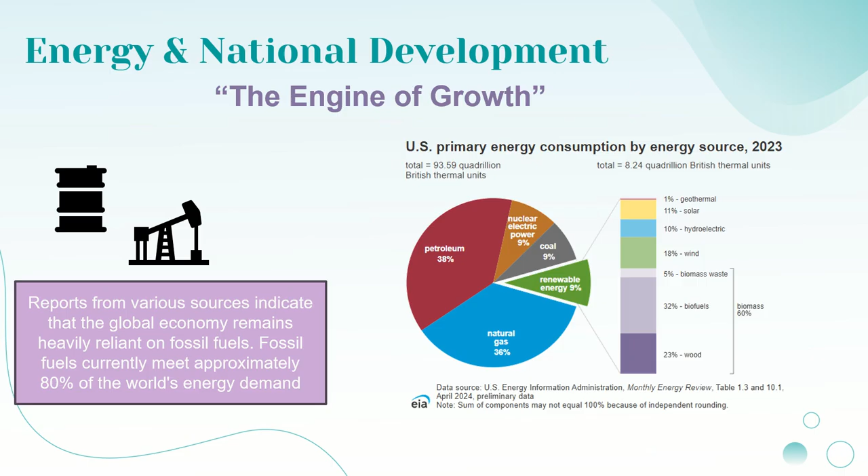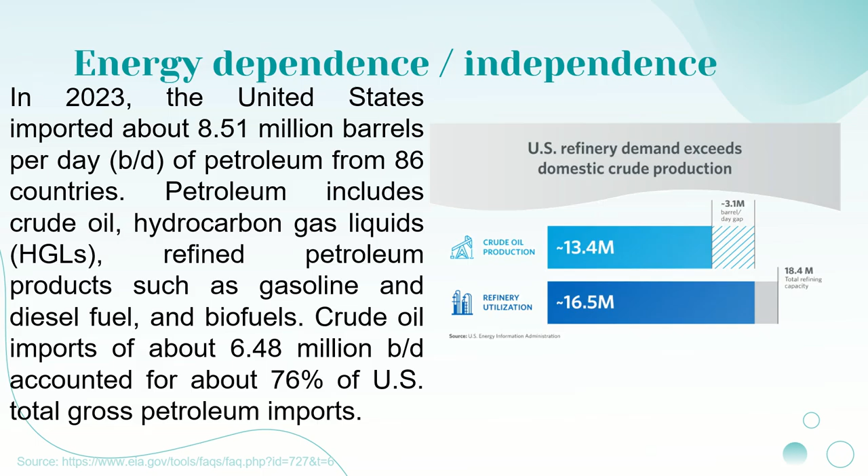But until today, reports from various sources indicate that the global economy remains heavily reliant on fossil fuels. Fossil fuels currently meet approximately 80% of the world's energy demand. Regarding energy dependence and independence, in 2023 the United States imported about 8.51 million barrels per day of petroleum from 86 countries. Crude oil imports of about 6.48 million barrels per day accounted for 76% of the United States' total gross petroleum imports. And why am I saying that?

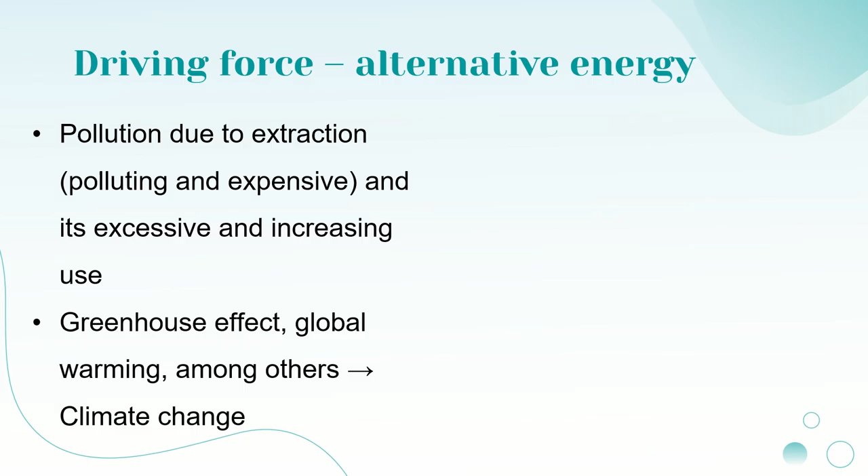Because it's important to remember that one of the most important things for a country is to be energy independent, and I will tell you why in the next slide. Another driving force is the pollution due to extraction and the excessive and increasing use of fossil fuels. Another is the greenhouse effect, global warming, among others, like climate change, right?

Remember that I said I'm going to talk about this later. So why is it important to be highly independent in energy? In the past, we had...

So investing in bioenergy is not only about sustainability, it's not only to prevent the impact on the environment, it's a smart move. Sustainability meets innovation. So the driving forces here would be climate change mitigation, like carbon neutrality, reducing greenhouse gas emissions, meeting climate targets.

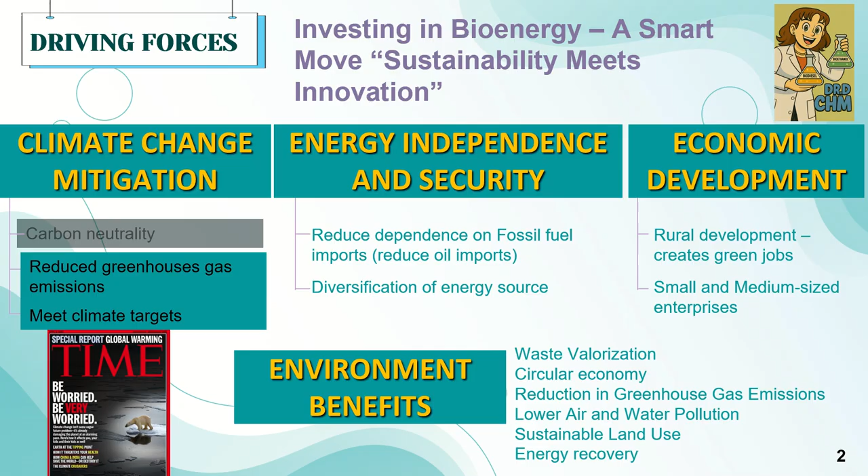And of course, we have some solutions like renewable energy: solar panels, wind turbines, geothermal power plants, hydropower. These are crucial, but not enough alone to meet global energy demand or emission goals.

It's important as well to remember that every process can generate an impact. That means that if you're trying to minimize the impact on the environment from the use of fossil fuels, but you're using fossil fuels to produce bioenergy, that doesn't make any sense. Sometimes you're doing everything right, however you are creating another impact.

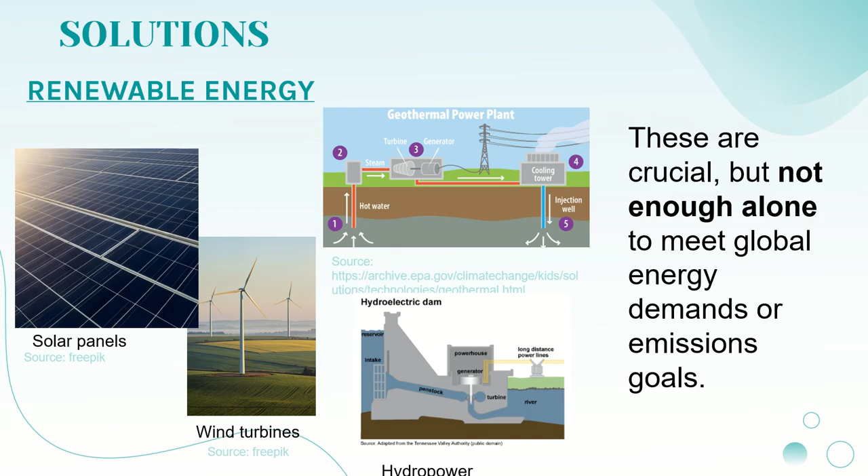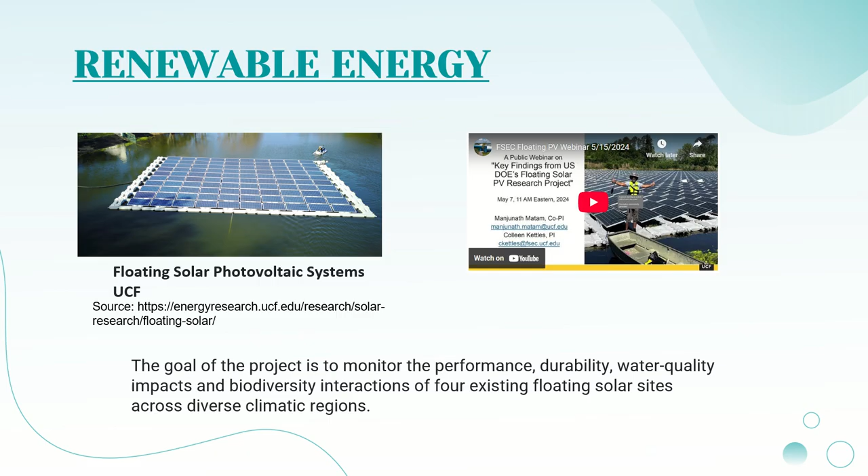This is why we always need to study everything, background studies and everything that we do. For example, with floating solar photovoltaic systems, UCF has a study, a research project to monitor the performance, durability, water quality impact, and biodiversity interactions of four existing floating solar sites across diverse climate regions. This is important because sometimes we think that's a good step, a good way to produce renewable energy, but then we are creating another impact. This is why those results are really valuable.

Besides renewable energy, we have bioenergy, which is also renewable, but not all renewable energy is bioenergy. Renewable energy encompasses a broader range of sources like solar, wind, and geothermal, which don't rely on organic matter like bioenergy does.

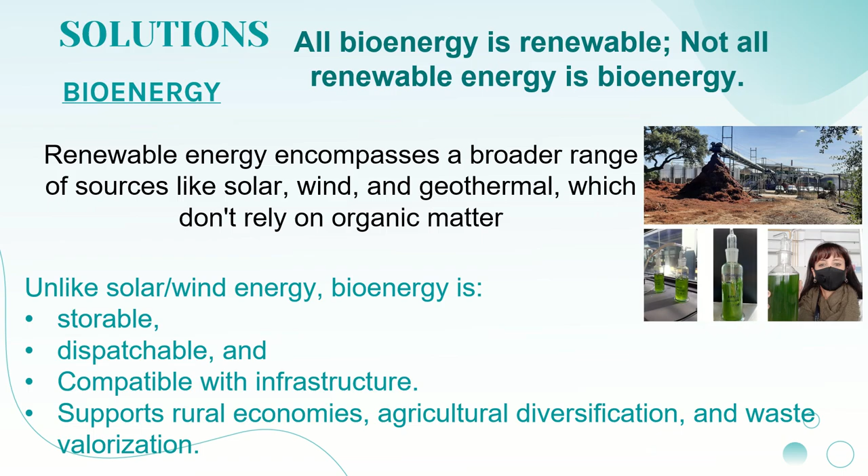That is a case of waste valorization, where we can use those microalgae not only to produce bioenergy, but also to produce protein as well.

Bioenergy is a form of renewable energy derived from biomass. And what is biomass? Biomass is defined as organic material derived from plants and animals, agriculture waste, algae, and more, used to generate fuel and electricity. It can also be defined as any organic material or waste that contains chemical building blocks like hydrogen and carbon.

These components are vital to our modern energy and materials economy. Biomass is the single largest supply of carbon on planet Earth, and is a sustainable and renewable source for products that are currently made from petroleum.

Here's how it works: we have photosynthesis. Trees and plants absorb the sun through photosynthesis, a complex process that involves the plant using energy from sunlight to combine carbon dioxide with water to produce sugar.

The energy is trapped inside until the organic material is converted into other products used as a source of energy and materials. Biomass contains carbon absorbed by plants through photosynthesis.

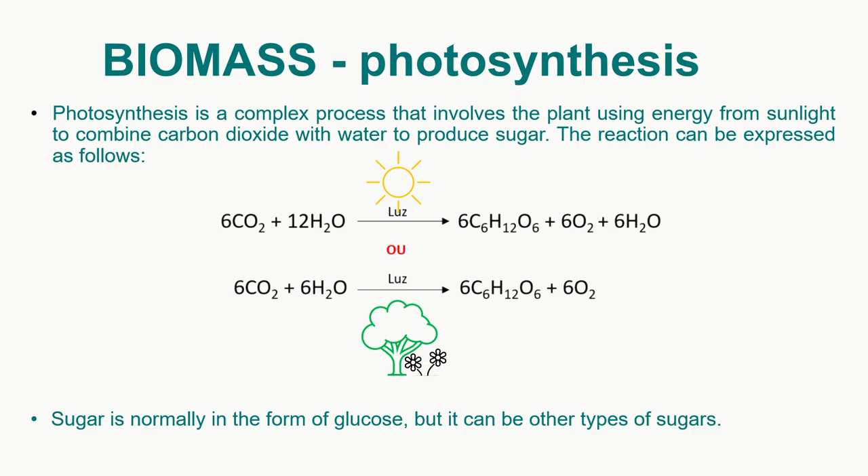When biomass is used to produce energy, the carbon is released during combustion and returns to the atmosphere, making modern bioenergy a low emission fuel.

We call this biogenic carbon dioxide, which originates from recently living or once-living organic matter, unlike fossil fuels. This CO2 and the carbon cycle here are part of a natural, relatively short-term carbon cycle.

Plants absorb this biogenic CO2 and use it during photosynthesis to produce sugar. These plants absorb it, then we use it again, then we burn it and it goes back to the atmosphere - that is a sustainable cycle.

With fossil fuels, this doesn't happen - non-biogenic CO2 is emitted to the atmosphere, but we don't have plants to absorb that carbon. So fossil fuels produce CO2 that isn't absorbed. That's why we have carbon-neutral bioenergy sources.

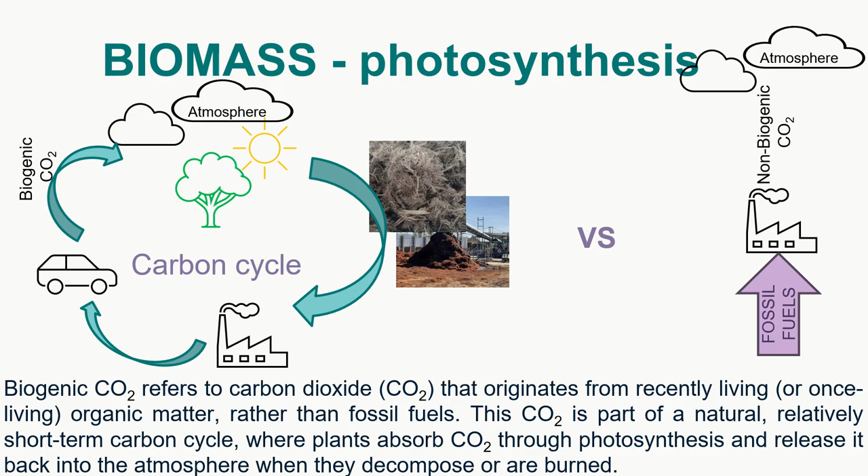There are several kinds of biomass, such as agricultural residuals and purpose-grown energy crops. Biomass also includes waste, and there are processes that work for many types of waste biomass, like animal waste.

Believe it or not, manure from farm animals, mostly cows, can be used to make electricity. It's put in a big tank called a digester, which we'll talk about in a few slides.

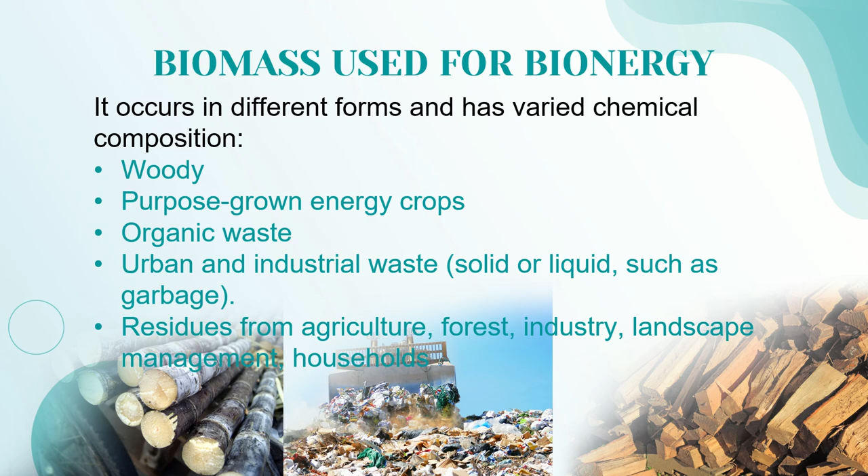Methane can also be captured in landfills, and we're going to talk about this as well.

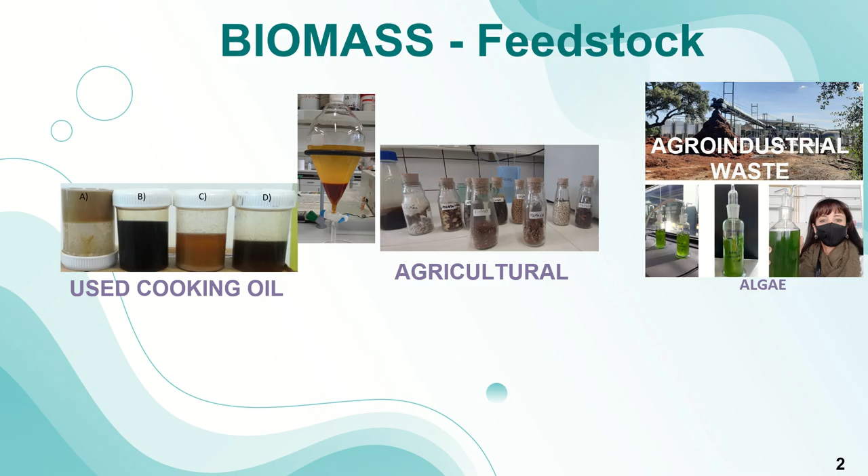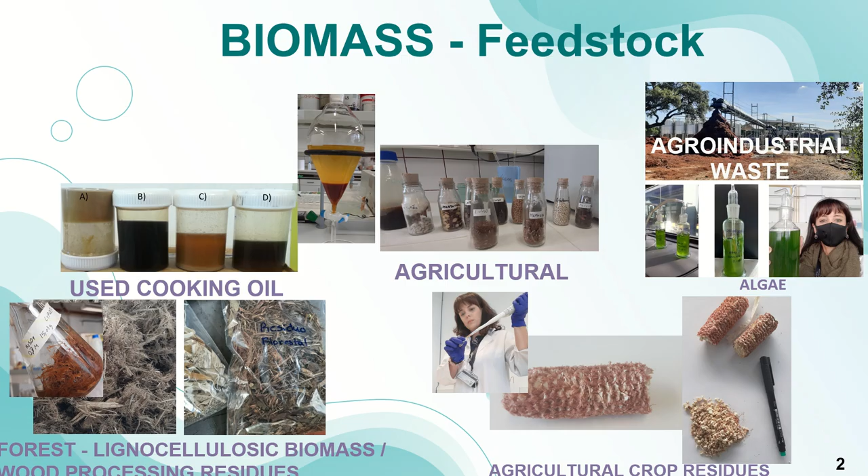Here we have a sample of other types of biomass, like used cooking oils, which can produce biodiesel from that waste. We also have agro-industrial waste, crop residuals, and forest lignocellulosic biomass like wood processing residuals - this was part of my last project.

Time to think a little bit. I will ask you to stop the video and think about this question: is any biomass useful for producing bioenergy?

Can I use any of the types I gave you as examples? If I'm looking through my window right now, I can see a tree outside with birds eating the seeds - something we humans don't eat, but the animals do. So probably there are some sugars there - do you think I can produce ethanol from that?

So is any biomass suitable for producing bioenergy? Think a little bit - those leaves that are coming down, do you think you can grab that and produce energy with it?

Okay, so the success of the biofuel and bioenergy industry depends on the quality and the quantity of biomass available, in addition to the cost effectiveness in terms of production and usage. So we depend on physical characteristics like humidity, granulometry, and density, chemical characteristics like energy properties, and rheological properties like elastic and cohesive. So the sustainability would depend on the type of energy, technology available, economic sustainability, and environmental sustainability.

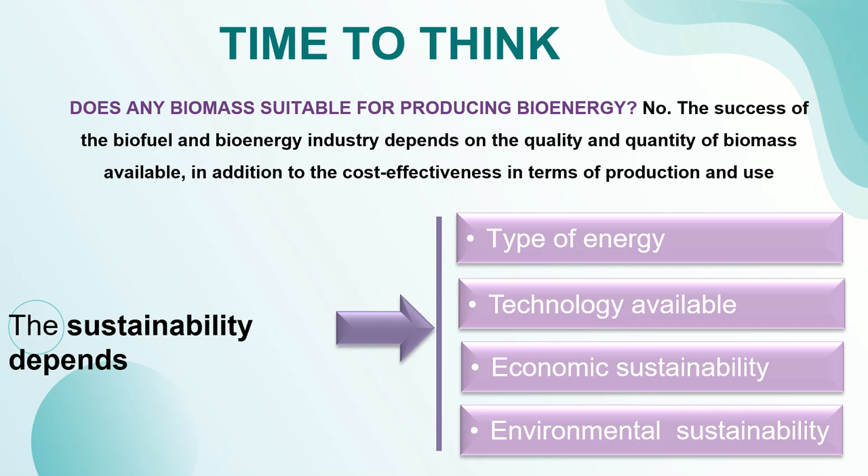Okay, so for hundreds of thousands of years, humans have used wood or charcoal made from wood for fuel to heat homes, right? And cook food. To make bioenergy from wood, scraps or sawdust can be collected from farms and forest manufacturers. There are several ways to convert biomass into usable energy, and it can even be turned into fuels to power cars. And I can see driving a car moved by wood, and trucks and airplanes.

So the technologies I'm talking about are biochemical conversions, physical chemical conversions, and thermal conversions. I'm talking here about the main processes that we use. In the biochemical conversion, we have anaerobic digestion. Remember the poop from cows that I mentioned? We can use anaerobic digestion. And we have fermentation, to produce ethanol, for example. And we have physical chemical conversion, that is transesterification, for example, that we can use to produce biodiesel.

And the thermal conversion has combustion, the oldest process that we have. So we can produce heat, and through the heat we can produce electricity. We have gasification, pyrolysis, and liquefaction. Pyrolysis and liquefaction will produce gas, oil, and coal.

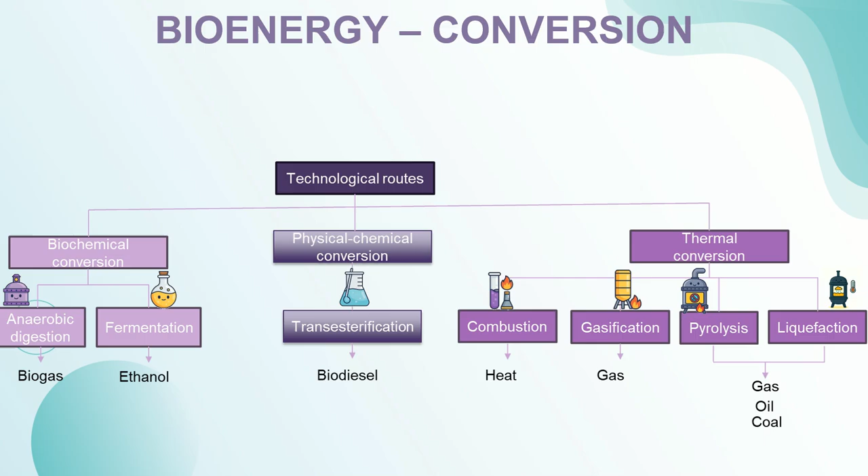And what they do is treat waste like urban waste. So they have the mechanical treatment that will separate the waste, so they can recover some recyclables and usable materials, and then they can send this waste to anaerobic digestion. So in the process, they will produce biogas. And also they can produce compost, rich in nutrients to correct soils.

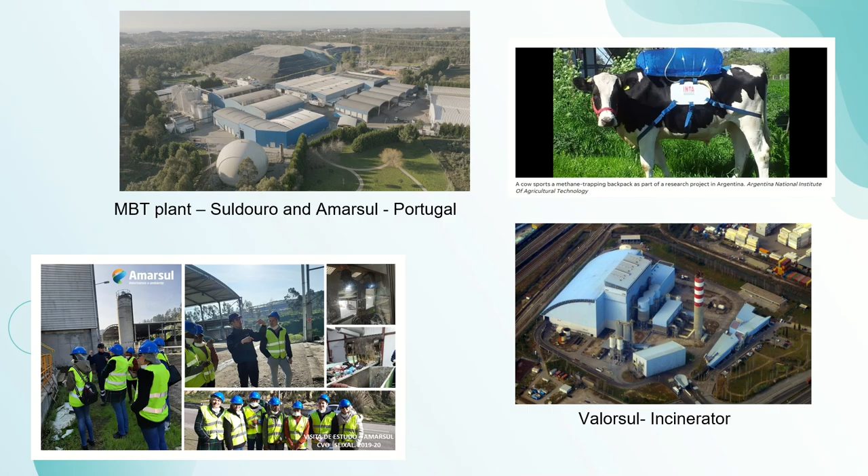Don't worry, this is painless. So the cow is not suffering. They are well, you can see it. She looks well here. But the gas is trapped inside of those bags, and they treat the gas, and they can have cars moved by methane in those places.

Not only them, but MBT plants as well. So they produce biogas and they can use that. So they can use also the manure of those areas, because remember the poop from cows is powerful, so we can send this to a biodigester, we'll stabilize this organic matter, and then we'll produce a gas. This biogas can be used to produce energy.

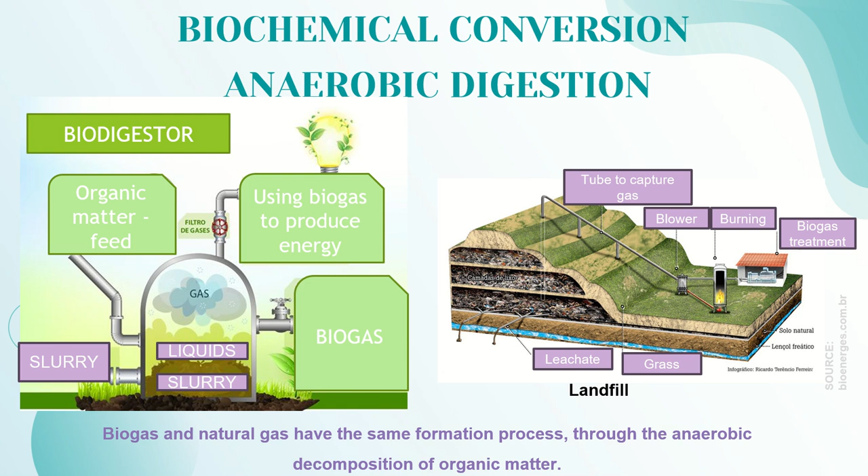So biogas and natural gas have the same formation process, but don't get them confused. Biogas is renewable energy and natural gas is a fossil fuel energy. So here you have an image of a landfill. That's a pretty new landfill in the back, and here we have the installation to capture the gas, treat the gas, and produce electricity as well.

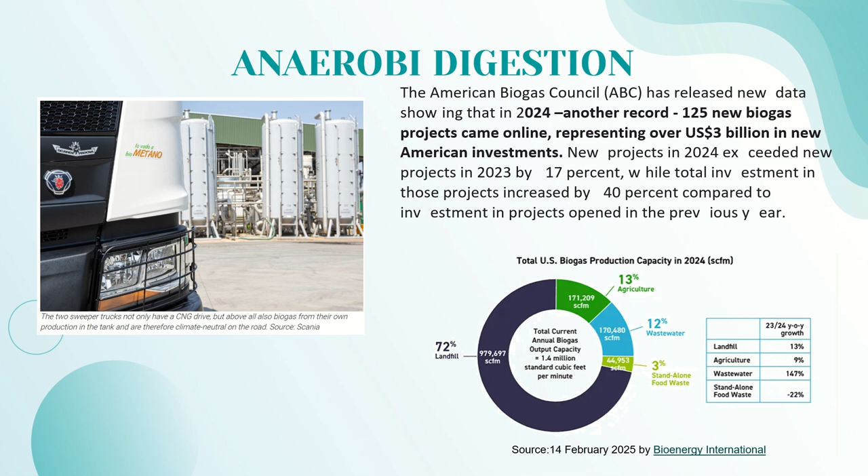The American Biogas Council has released new data showing in 2024 another record: 125 new biogas projects came online, representing over 3 billion in new American investments. Of biogas production here in the United States, 72% comes from landfills, 13% from agriculture, wastewater 12%, and 3% from standalone food waste.

So we have the biochemical conversions. Here in this case we have fermentation. Alcoholic fermentation is the action of yeast, usually unicellular fungi of the species Saccharomyces cerevisiae, on a fermentable sugar-containing solution or suspension. Fermentation is a biological process in which the energy generated by oxidation reactions can be used for yeast growth, and the anaerobic partial oxidation of D-glucose is used to produce alcohol and CO2.

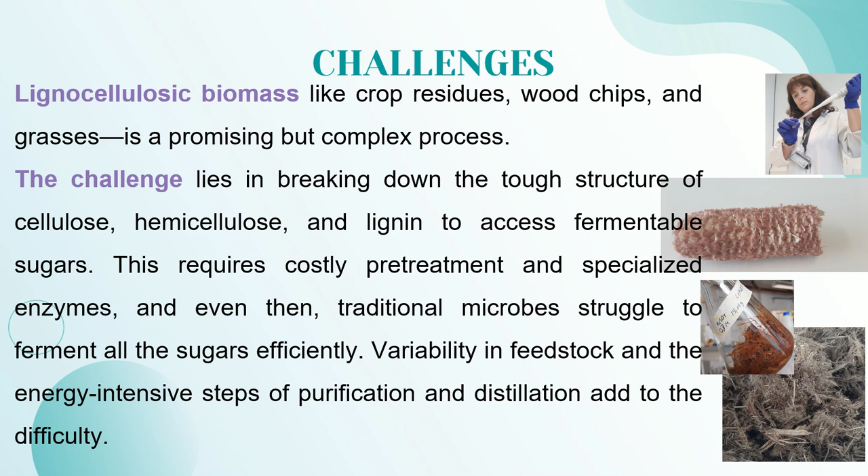However, there is research going on that promises good fungi that will produce ethanol at a very high yield, because they are more resistant to ethanol than the other fungi that we have. Another problem is the variability in the feedstock. It's hard to get the same type from the beginning up to the end. And then we also have the purification and distillation steps, which add more cost to this process.

So how could we make this more sustainable? If you create a project, a process that is in context with the biorefinery, that will be more sustainable. What is the refinery? A fossil fuel refinery will not produce only diesel or gasoline. For example, they produce heat, and through the heat they produce energy, and they produce fuels and chemical compounds as well. So the same thing we can do with bioenergy. So we can create a biorefinery.

Instead of oil, we're going to use biomass. Fossil fuels will produce CO2, but that is not carbon free like a biorefinery, where the CO2 will be absorbed by the plants that were used to produce the biofuel.

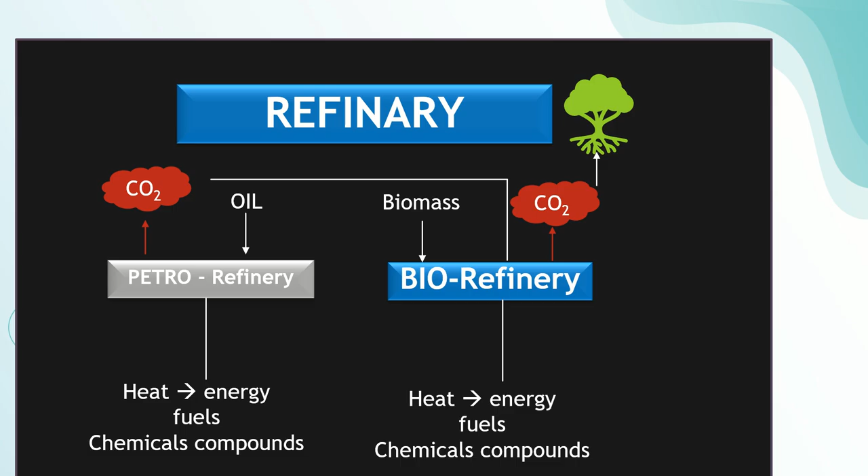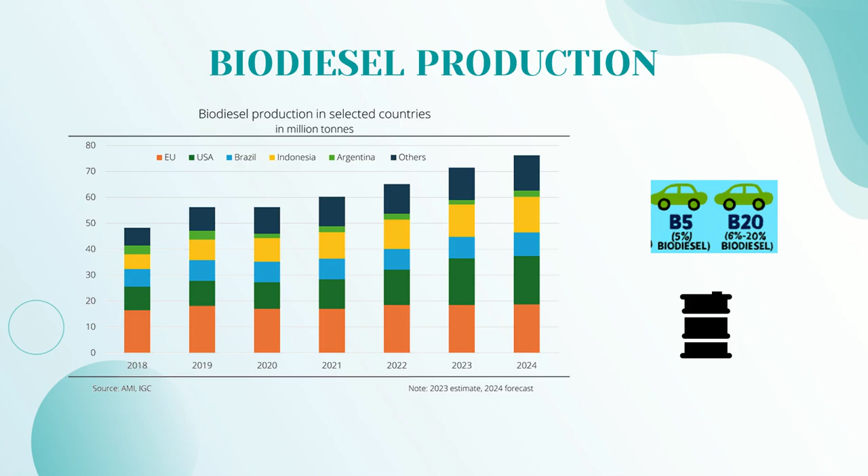This is what it says on the last report in 2024. So based on the official data, private sources and forecasts, the estimated global 2023 production of biodiesel, including hydrotreated vegetable oil (HVO), reached a record high. Let me just get back over here. A high of 71.5 million tons. This would be an 11% increase over the previous years, almost exclusively based on increases in North America, South America and Asia. So here you can see the biodiesel

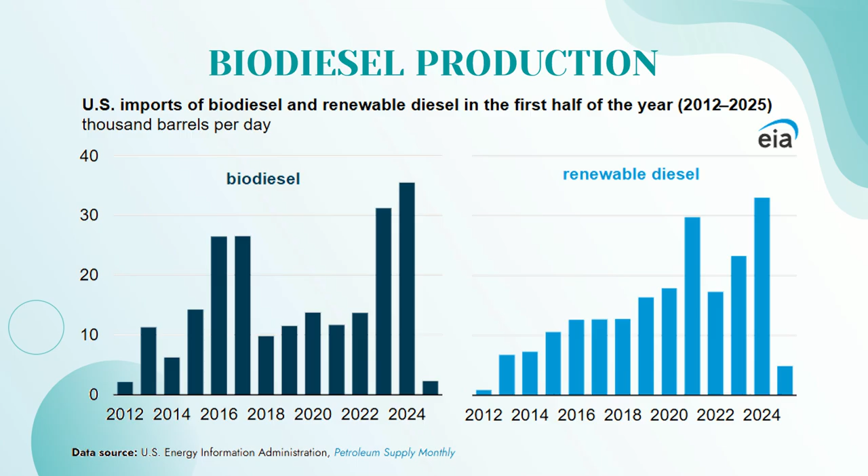pyrolytic decomposition. So in this part, the long chain components of solid fuels will be broken down into short chain compounds, producing carbon monoxide and gaseous hydrocarbons. And then we have the gasification of volatile fuel, then the gasification of solid carbon, and then oxidation of combustible gas, approximately between 700 degrees Celsius and 1400 degrees Celsius. And then we're going to have a very exothermic reaction, so combustion, we're going to produce heat and light, and with this we can warm water, we can produce steam, and we can produce electricity as well.

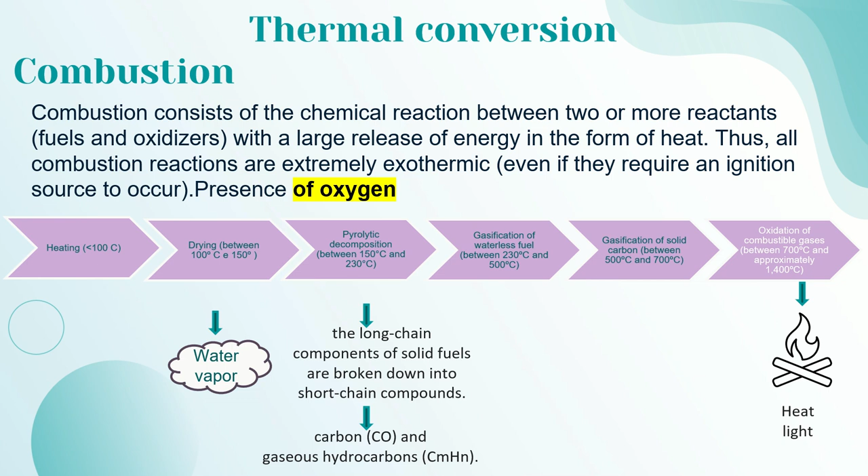The main combustion equipment: we have gas turbine combustion chambers, ovens, boilers, incinerators. The most popular is the boiler with grate combustion, which is a classic and widely used system for burning solid fuels like coal, biomass, wood, and including waste. It is really relevant in industrial and municipal settings where fuel flexibility and robust operation are key. So, grate combustion. Here are the key components.

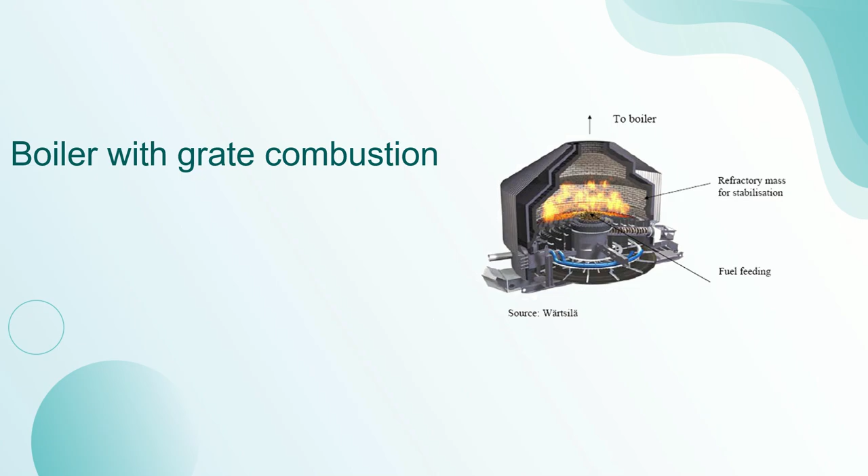But here it's better to see it, because the air supply system controls primary and secondary air for complete combustion. And so we have here the waste coming, right? The solids come in. So the combustion chamber, where volatile gases and fixed carbon burn in stages. So that is another thing. It's easy to remove the ashes, manual or mechanical, depending on the grate type.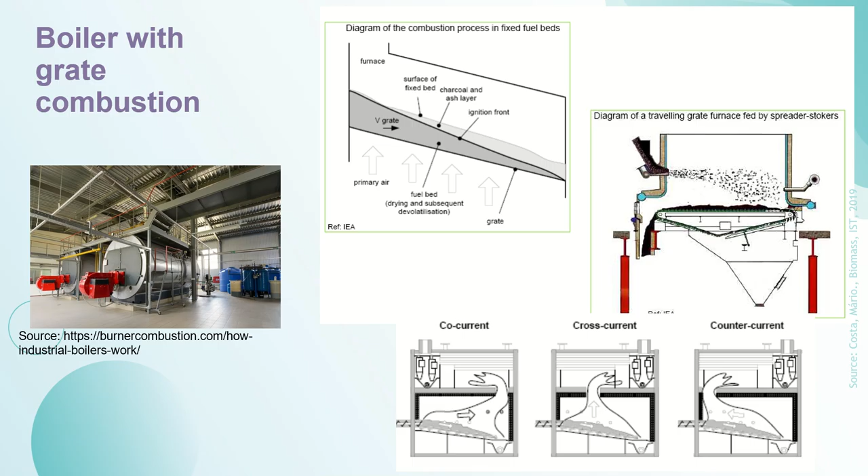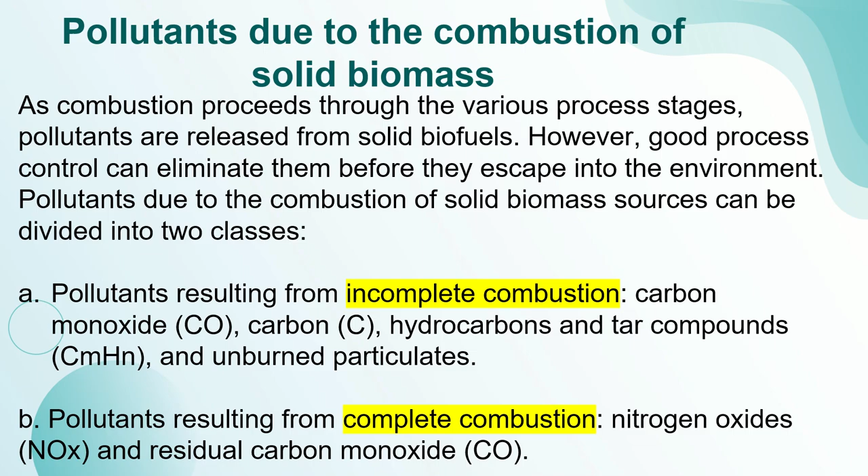Okay, so in this type of combustion, as used in many places, we have some pollutants, of course, resulting from incomplete combustion, which is carbon monoxide. We have carbon, hydrocarbons, and tar compounds, unburned particulate, and we have pollutants resulting from complete combustion, with nitrogen oxides and residual carbon monoxide. So besides combustion, we have pyrolysis, which is a thermochemical decomposition process that breaks down organic materials at high temperature in the absence of oxygen. Here we don't burn, okay?

So here it's a process where we're going to produce a biochar that normally is used to correct soil. It is also used as filtration material to clean up wastewater, or as I said, used as a soil corrective, so it will be returned to soil as a conditioner to improve the chemical, physical and biological properties. Also, we can produce biofuels and syngas. So, slow pyrolysis occurs at a temperature of approximately 400 degrees, and the final product is charcoal, also called biochar.

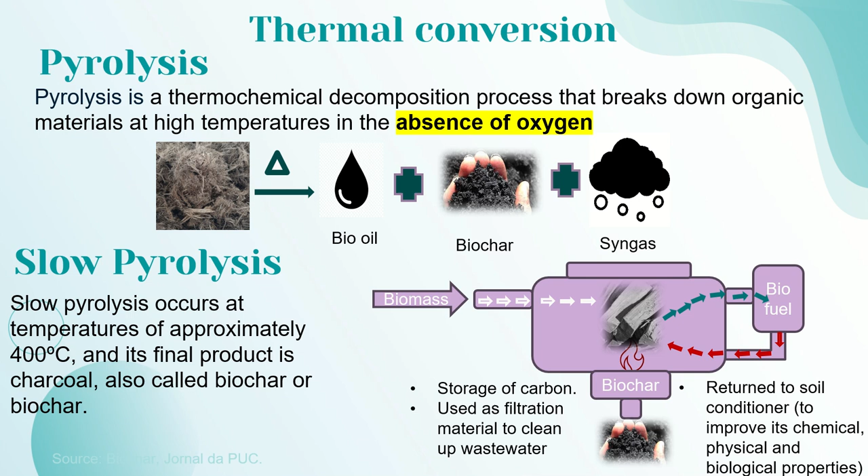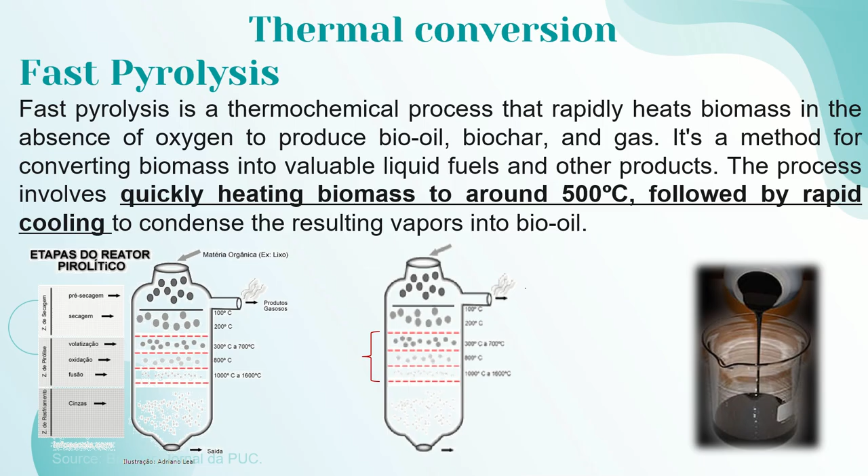And we have also the fast pyrolysis that we're going to produce the bio oil over here. So it's a thermochemical process that rapidly heats biomass in the absence of oxygen. I said that in the pyrolysis we don't have oxygen, okay? And they will produce bio oil, biochar, and gas. It's a method to convert biomass into valuable liquids, fuels, and other products. The process involves quickly heating biomass to around 500 degrees, followed by rapid cooling to condense resulting vapors into bio oil. Incredible process, I love it.

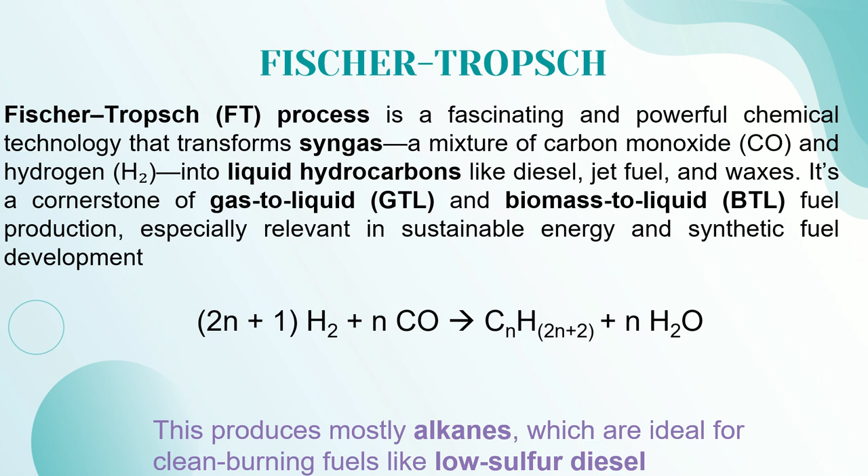And another process that is very important here in terms of thermal process is the Fischer-Tropsch process. It's a fascinating and powerful chemical technology that transforms syngas. Remember, syngas produced via pyrolysis, that is a mixture of carbon monoxide and hydrogen, into liquid hydrocarbons like diesel, jet fuel, and waxes. It's a cornerstone of gas to liquid and biomass to liquid fuel production, especially relevant in sustainable energy and synthetic fuel development. So these produce mostly alkanes, which are ideal for clean burning fuels like low sulfur diesel.

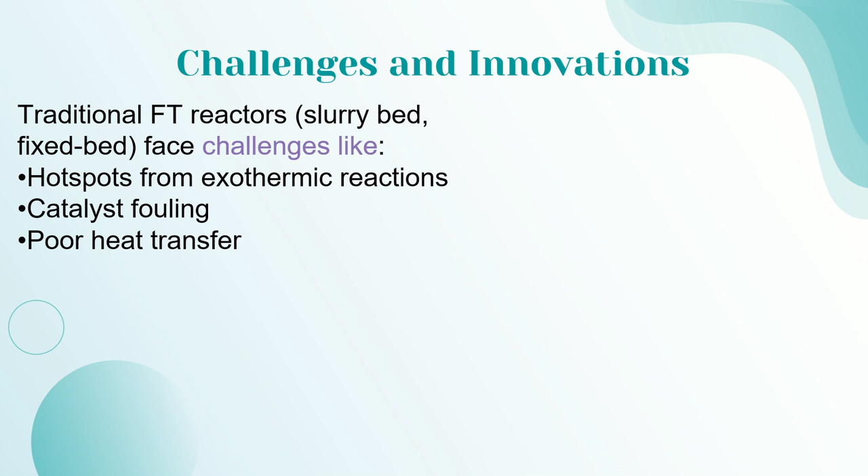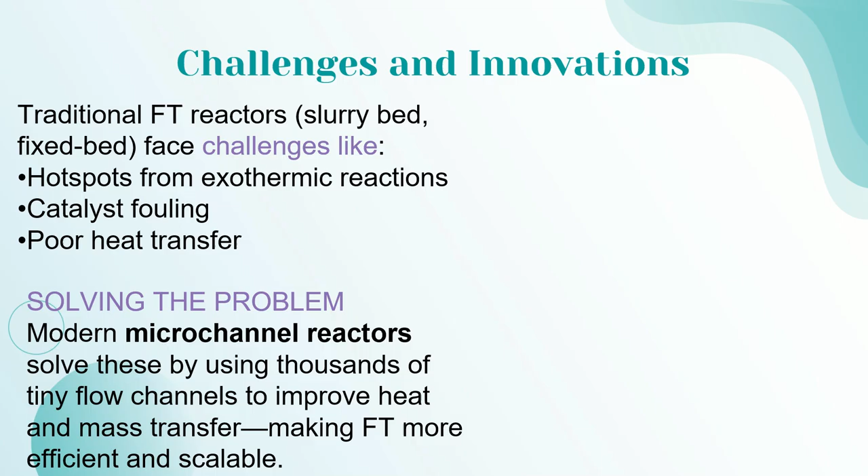The challenge here for traditional Fischer-Tropsch reactors like slurry bed, fixed bed, is the hotspot from exothermic reaction, and we have the catalyst fouling, poor heat transfer, and also, we know that all the process has a challenge, right? But the challenges are there to be solved, and they solve the problem with the modern microchannel reactors. They solve this by using thousands of tiny flow channels to improve heat and mass transfer, making Fischer-Tropsch more efficient and scalable.

In the real world, Fischer-Tropsch fuels are already being used in aviation. In fact, synthetic paraffinic kerosene produced via Fischer-Tropsch has been blended with conventional jet fuels for transatlantic flights, showing its readiness for commercial deployment.

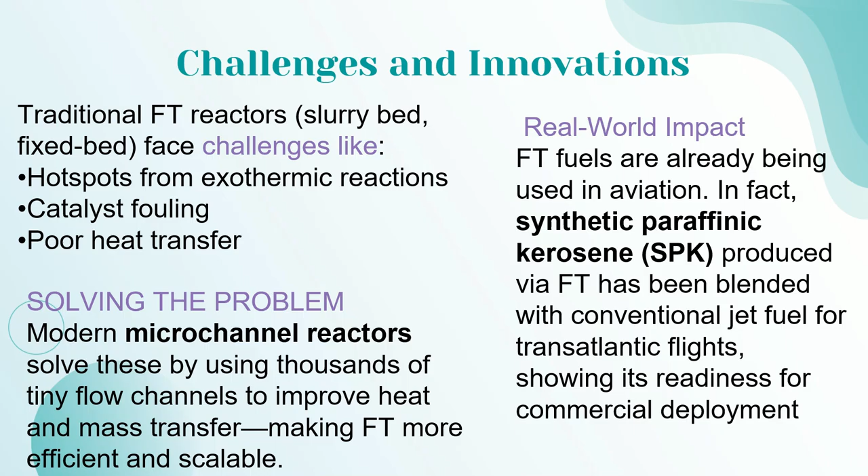So HVO is another biofuel. It's not biodiesel, but it's also produced with vegetable oils. It's actually hydrotreating of vegetable oils. It's a modern way to produce very high quality bio-based diesel fuels without compromising fuel logistics, engines, exhaust after-treatment devices, or exhaust emissions.

Why is this different from the biodiesel if they are produced from the vegetable oils? Can you think about it? Can you tell me the difference between HVO, also called renewable diesel fuels, instead of biodiesel? Why are they different? 5 minutes, or stop your video and think about it. Why HVO? What does hydrotreating say over there? Okay,

HVO is a process where hydrogen is used to remove oxygen from triglycerides. So we're gonna remove all the oxygen from triglycerides, and we will not produce glycerol as a byproduct. Additional chemicals such as methanol for FAME production are not required as well over here. Okay, so hydrogenation removes all oxygen from vegetable oils, while transesterification does not. So that is the main difference between HVO and biodiesel.

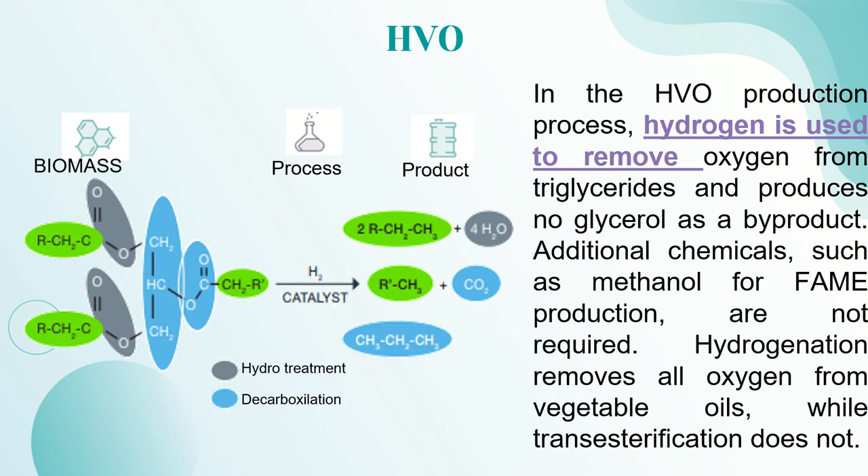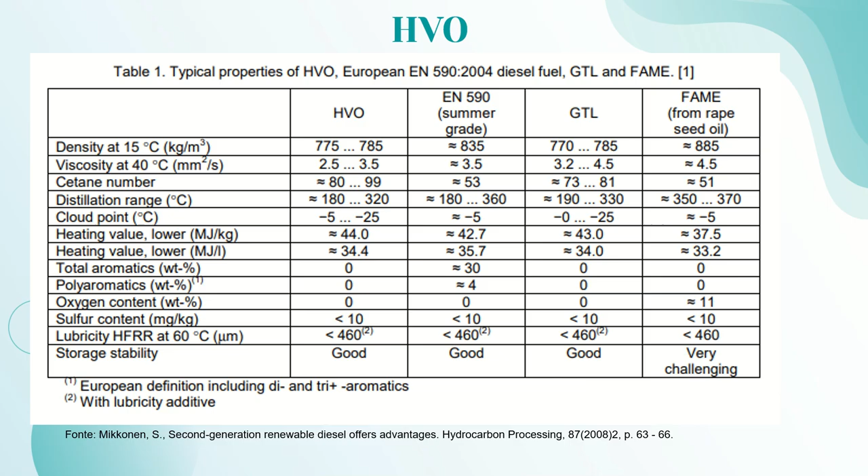Biodiesel is very challenging because we have oxygen in it, so we suffer oxidation. So normally we can't store it for more than 6 months. So if you have a car moved only by biodiesel, and if you go to another country to study and get back 1 year later, you're gonna throw away your biodiesel, okay, because that will not last forever.

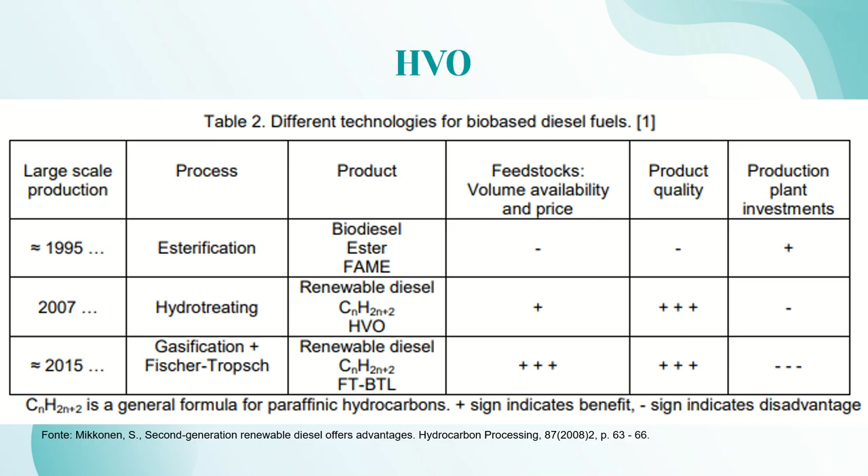So here another table that compares Fischer-Tropsch, hydrotreating, and esterification. So esterification is the biodiesel. And the volume available and the prices, you can see the Fischer-Tropsch is better compared to esterification and hydrotreating. The product quality of hydrotreating, which is the HVO, and Fischer-Tropsch is much better than esterification, so the biodiesel. And the plant investment is really high; it's a benefit for esterification, and it's a disadvantage to HVO and Fischer-Tropsch, because they are very high cost plants.

Okay, so I know this is a short time to talk about everything, so I tried at this point to show you the most important processes and what is happening in the world, but we cannot forget how they divide and classify the types of biofuels that we produce. We have the first generation biofuels, that is conventional biofuels that use food crops to produce biofuels, such as sugar, starch, and vegetable oils.

But this has a big problem because it's competing with the food, right? So we need to pay attention to food safety. Like in this cartoon over here that says, no, but I can offer you a gallon of ethanol. So why does this happen?

Remember what I said about soy. Imagine if I have a corn or sugar cane field and I use it to produce food, but some people from industry come and say, can you sell for me? I'm gonna produce ethanol, and they offer me double. So I'll probably sell it to them for double. Then the part we sell for food will have a very high cost, because now we have a small part to sell for the food sector, so the price will increase. This is why it's a problem to compete with the food area.

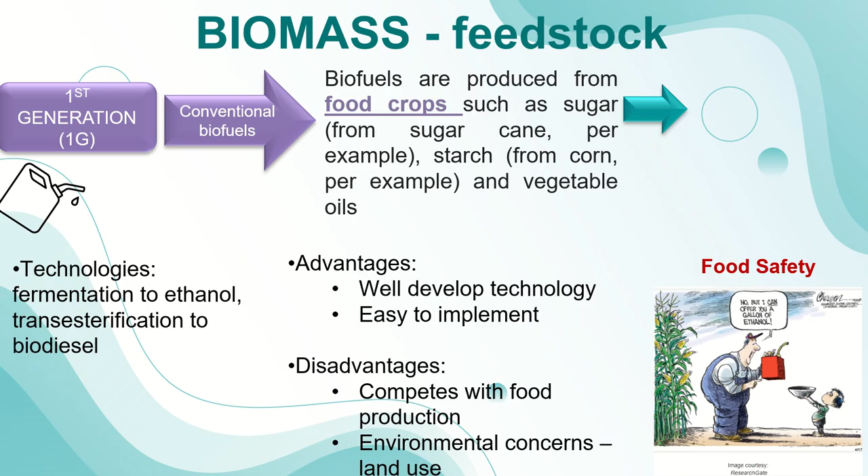Of course, on the other side, those technologies, fermentation to ethanol and transesterification to biodiesel, are well developed, so easy to implement. The big disadvantage here is that it competes with food production and raises environmental concerns with land use.

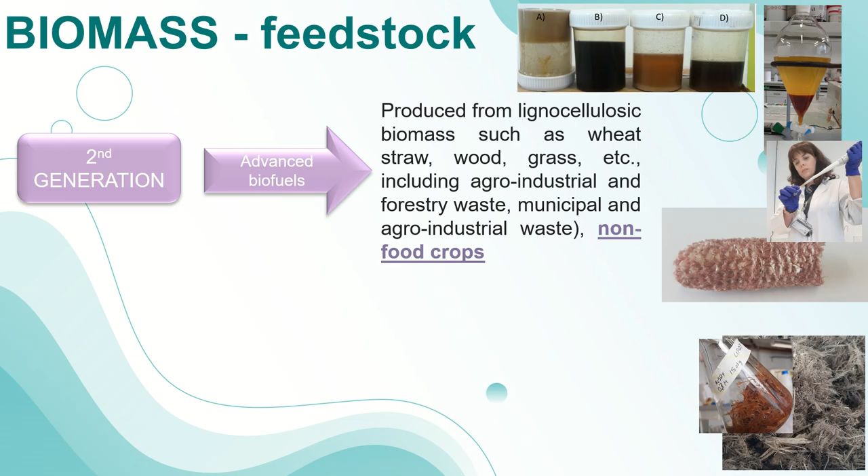They have the second generation, which is biofuels or advanced biofuels produced from lignocellulosic biomass, such as wheat straw, wood, grass, including agro-industrial and forestry waste, municipal and agro-industrial waste, and non-food crops.

These photos are all mine. So from my project, we always try to find a new solution, a new way to produce bioethanol or biodiesel in a very cost-effective way.

But with technology like enzymatic hydrolysis, gasification, fermentation, transesterification, and anaerobic digestion, we still have very high processing complexity, mainly because of the pre-treatment, with the high cost of enzymes and other treatment processes like steam explosion, which is really high cost as well.

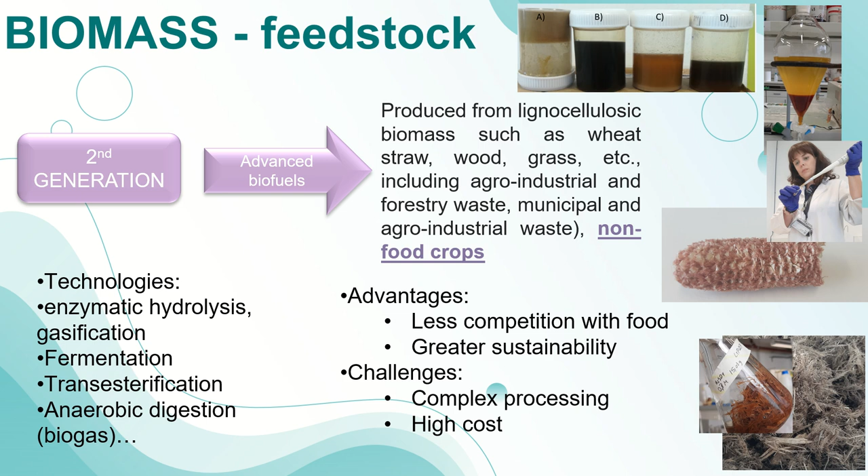So the advantage here is less competition with food and sustainability in terms of environment, but in cost it is still high. It's really hard to compete with fossil fuel price and the price of first generation ethanol.

And we have the third generation, which uses biofuel from marine biomass and algae. So we can produce biodiesel, biogas, and hydrogen. The advantage here is high yield per area. See here, I have a microalgae sample, and we can produce a bunch of microalgae in a very small area, while to produce soy you're gonna need a very huge land.

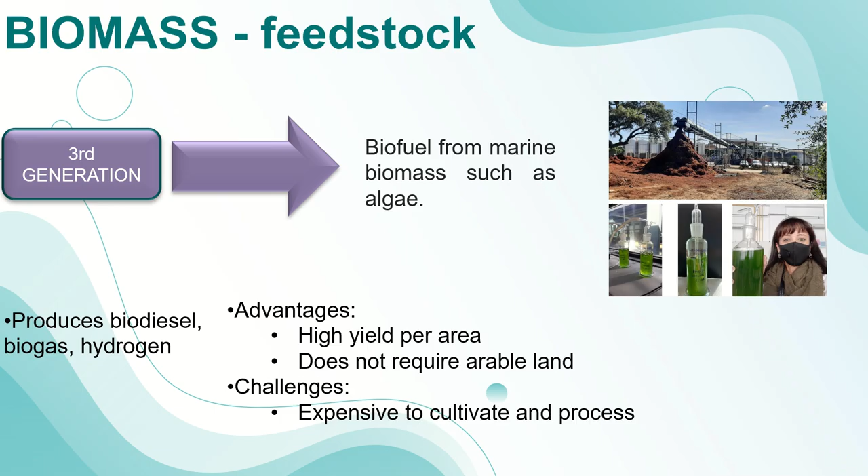But the challenge here is that it's expensive to cultivate and process. This is why in my project, which I work on with my colleague, it's actually her project, we use waste from industry. That's grape waste, grape bagasse, that we use part of as a nutrient. It's not only grape, but part of the nutrient used to grow microalgae, which is very sustainable.

And we have the fourth generation, which is advanced, combining cutting-edge technologies like synthetic biology and genetic engineering, and focusing on maximizing yield, efficiency, and sustainability. So when you talk about genetic metabolic engineering, microorganisms are engineered to optimize their metabolic pathways, making them efficient cell factories for direct solar-to-fuel conversion, for example.

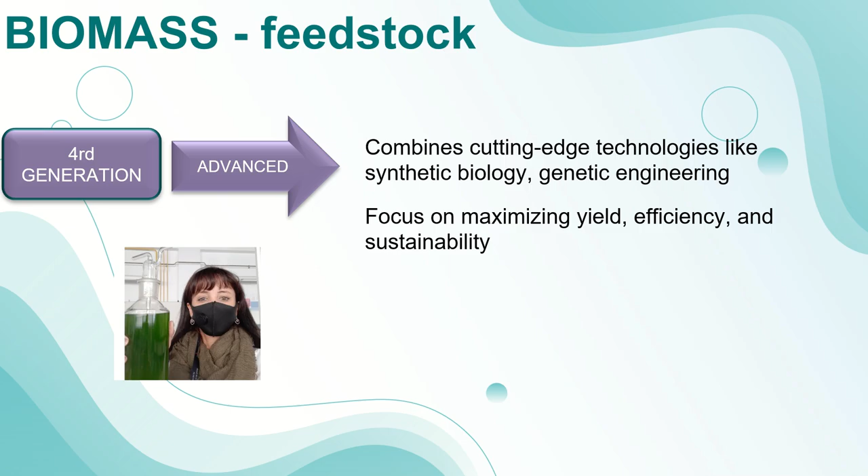Despite the high costs, advancements in the costs associated with cultivating and processing genetically modified biomass for large-scale biofuels remain high, according to scientists. So it's really high. During this class, you could see that we have different types of conversion processes and different types of biomass.

But you learn that not all biomass can be used to produce bioenergy because it needs to be sustainable. We need quantity, we need availability, and it needs to be close, because if you're gonna spend gas or produce pollution, emissions and everything just for transportation, your process starts to be unsustainable. If you use fossil fuels like coal or natural gas to power bioenergy facilities, this undermines the carbon savings. If you generate hazardous waste or toxic byproducts during processing, especially in chemical pretreatment or catalyst recovery, that is unsustainable.

If you use excessive transportation and feedstocks are shipped at a long distance, that is unsustainable. So you can see and hear from me that we can produce biogas from animal waste, go to the biodigester and produce biogas, and use it. Some countries already have trucks moved by methane.

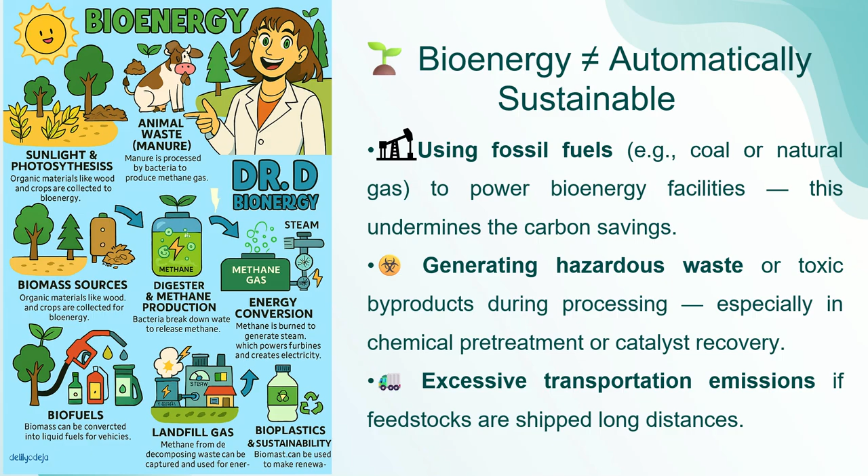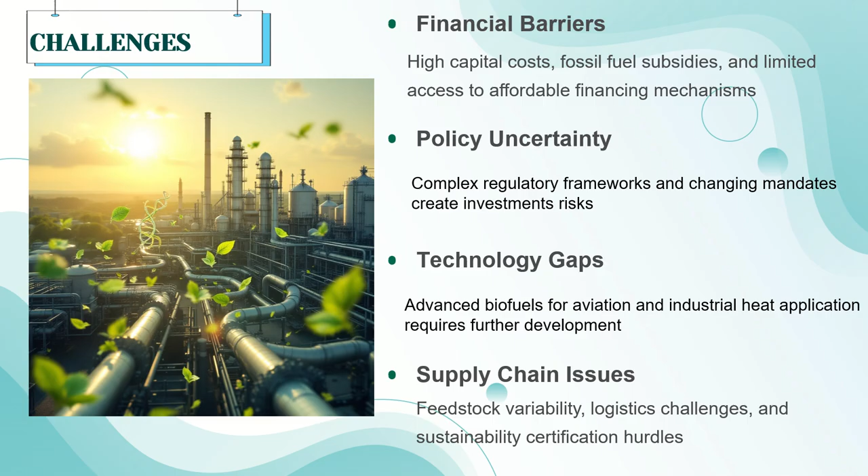So the challenges here: policy uncertainties, financial barriers or high capital costs, fossil fuel subsidies, and limited access to affordable finance mechanisms. Complex regulatory frameworks and changing mandates create investment risk. Advanced biofuels for aviation and industrial heat applications require further development, and feedstock variability, logistics challenges, and sustainability certification are not making the bioenergy life easier.

Of course, we have legislation driving bioenergy research and production, like the Renewable Fuel Standard, that establishes annual volumetric requirements for renewable fuels for the transportation sector, driving demand for conventional and advanced biofuels. We have the Energy Independence and Security Act that sets targets of 36 billion gallons for renewable fuels by 2022, including 16 billion gallons from cellulosic biofuels.

And we have the Sustainable Aviation Fuel Grand Challenge. The target is 35 billion gallons per year of sustainable aviation fuel production by 2050.

We have different types, as you saw over there. Conventional biofuels are any fuels derived from starch feedstocks. Conventional biofuels produced in plants built after 2007 must demonstrate a 20% reduction in life cycle greenhouse gas emissions. And the advanced biofuels - I'm mentioning this because it's in the Renewable Fuel Standard.

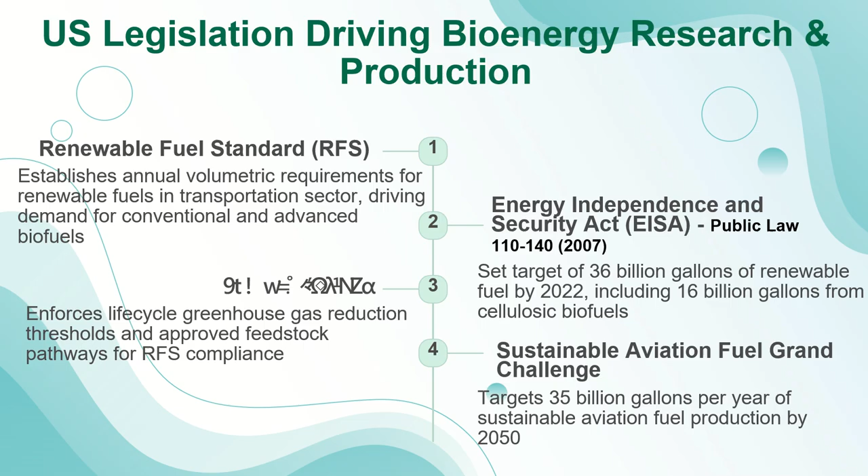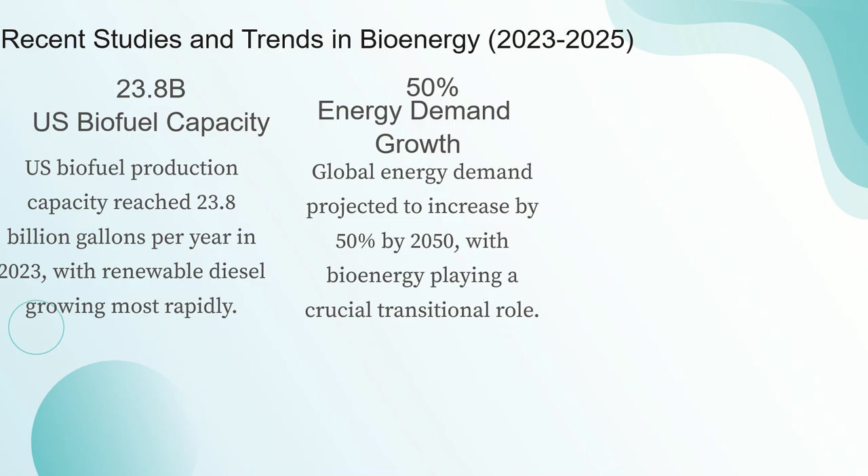Recent studies and trends in bioenergy: 23.8 billion US biofuel capacity per year in 2023, with renewable diesel growing most rapidly. 50% energy growth by 2050, with bioenergy playing a crucial transitional role.

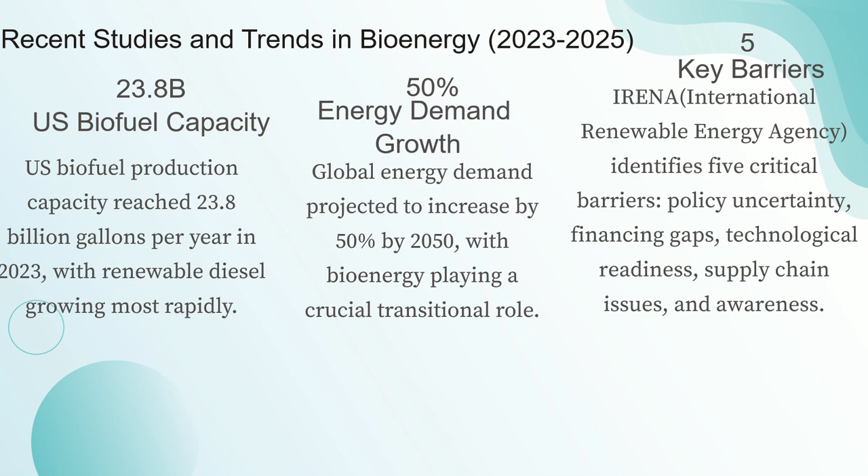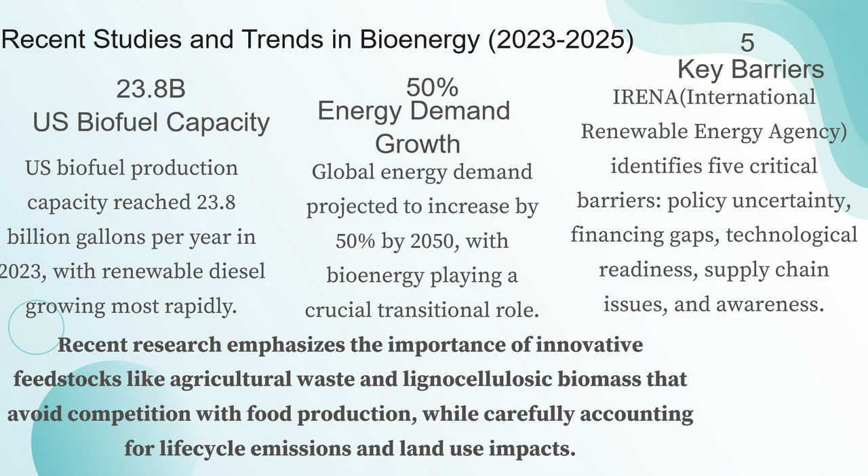5 key barriers - IRENA, the International Renewable Energy Agency, identifies 5 critical barriers: policy uncertainty, financing gaps, technological readiness, supply chain issues, and awareness. Recent research emphasizes the importance of innovative feedstock like agricultural waste and lignocellulosic biomass that avoid competition with food production, while carefully accounting for life cycle emissions and land use impacts.

I would like to talk a little bit about my projects here, biodiesel and bioethanol innovations. Biodiesel from waste cooking oil, reducing the sulfur content. I work with PRIO Industry, which is the third biggest producer of biodiesel in Europe.

The other project that I have is bioethanol from lignocellulosic biomass, which I'm trying so hard to bring to Florida. This project involves advanced non-food competing feedstock utilization, enzymatic and chemical pretreatment innovation, and fermentation processing enhancement.

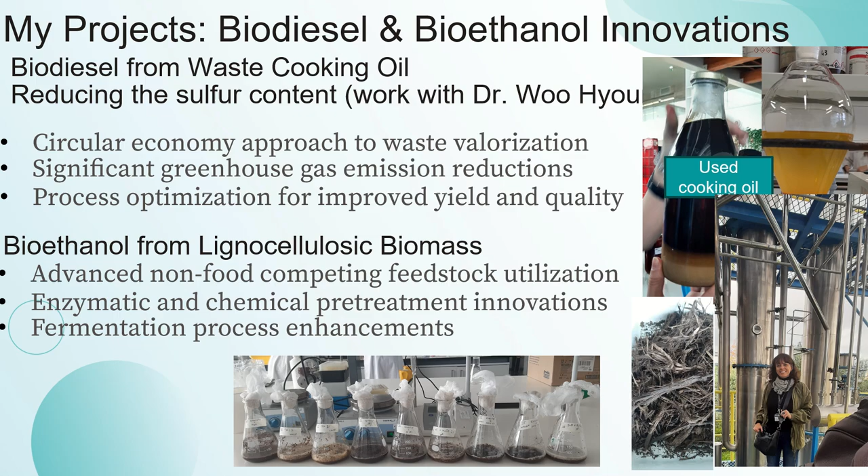This is the biomass that I was using, lignocellulosic biomass. It's wood, a waste from the paper industry actually. And here are some samples that I was analyzing in the lab.

So the advantages of bioenergy: we have a renewable resource derived from widely available organic materials, including forest residuals, agricultural waste, and dedicated energy crops. Waste reduction - we valorize organic residuals, reducing landfill methane emissions and creating value from waste streams.

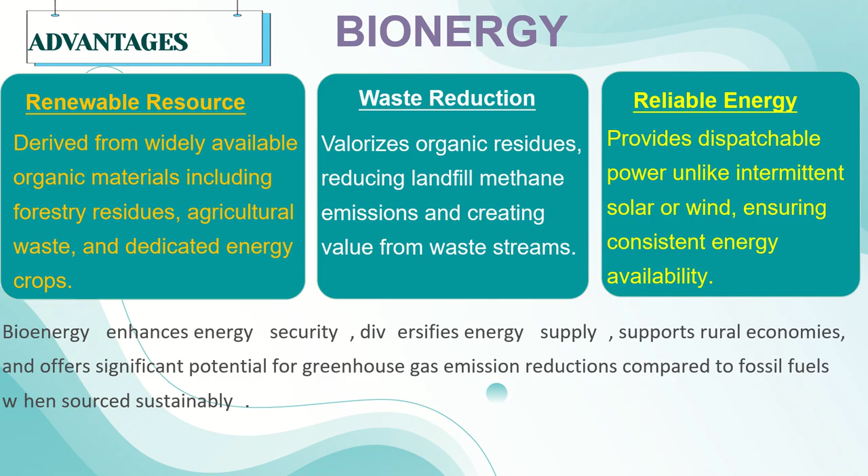Reliable energy provides dispatchable power, unlike intermittent solar or wind, ensuring consistent energy availability. Bioenergy enhances energy security, diversifies energy supply, supports rural economies, and offers significant potential for greenhouse gas emission reductions compared to fossil fuels, when sourced sustainably.

Diverse energy equals a resilient future. We need a diverse energy portfolio: solar, wind, nuclear, and bioenergy. Bioenergy is the bridge to a low carbon, more inclusive energy future. Let's rethink waste, rethink fuel, and power progress and sustainability.

This is important - remember, not all biomass can be used to produce bioenergy, and not all bioenergy is economically sustainable. If you want to produce sustainable bioenergy, we need to follow the same steps as an oil refinery, so we need to work in the concept of a biorefinery - not only producing biofuel, but also other chemical compounds with added value, so that it can be sustainable, and we can take advantage of all the resources that waste can give us.